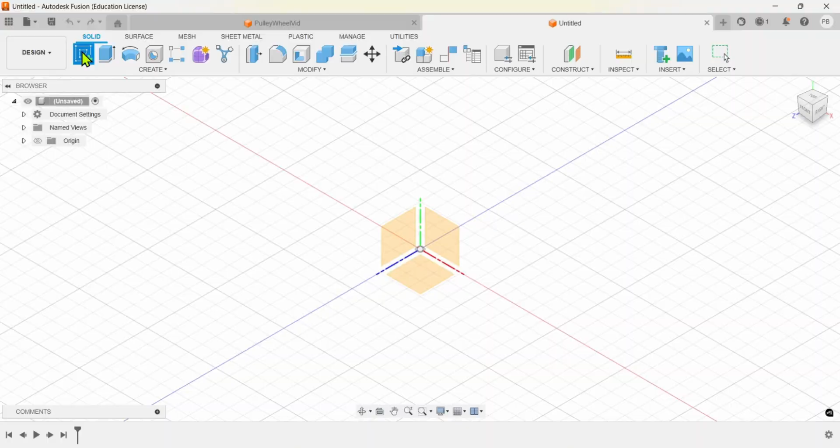In this video, I'm going to make a pulley wheel. I have an empty design right here. I'm going to come over to my create sketch. I'm going to click on it. And then I'm going to select a plane. I think I'm going to get this plane right here.

Click on that. Now I'm going to scroll in a little bit because it's going to be a small pulley wheel. That should work. I think I'm going to center this a little better though. So I'm going to hold my mouse wheel down and then just drag.

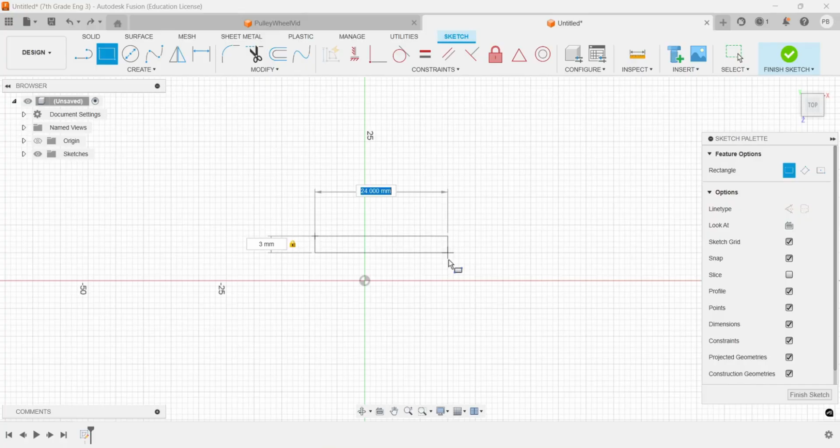Let's add a rectangle to our sketch. So I'm going to go to Create, Rectangle, 2-point rectangle. I'm going to click around here, drag this out a little bit, and then I'm going to type. Oh, it looks like it's got the height first. I'm going to do 3 millimeters for height, and then 30 millimeters for width. If you get the reverse order, just go ahead and put these values in.

Now you will notice if you click on this, you could move this around. It is not constrained. We should do that, right? So let's go to a constraint, and I'm going to go here. I'm going to look for the horizontal vertical constraint. Click on it. You can also see it up here.

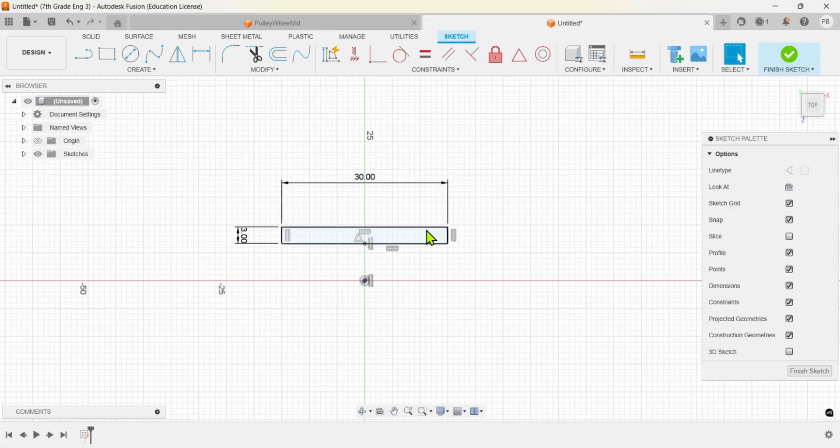I want to find the midpoint of this line, so I'm going to hold the shift button down. Oh, look at that. I see this little X with this little triangle there. That's the midpoint. Let's get it again. Click on that. I'm going to get the center point of my sketch. Click on that. Oh, now we got some constraints. And you'll notice that these lines turn black. But we can still move this rectangle up and down. Watch. Ooh, that's not quite there yet.

Let's go to Create. Let's go to Sketch Dimension. I'm going to grab this line right here. I'm going to grab the center of my sketch. I'm going to pull this out. I think I'm going to make this 4 millimeters. Now that is fully constrained.

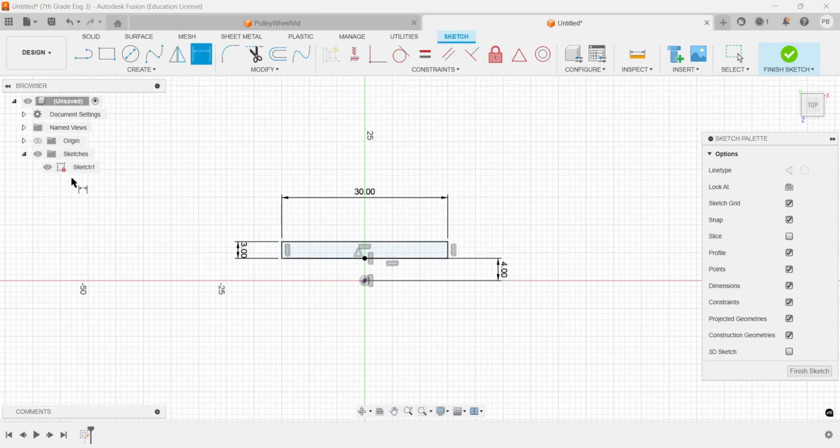How can I tell? If I come over to Sketches, open that up. Oh, look, I got a little red lock right here. That's good. That's what we're going to be shooting for. I think I'm going to move this dimension down a little bit so it's not really in my way. How about down below the drawing?

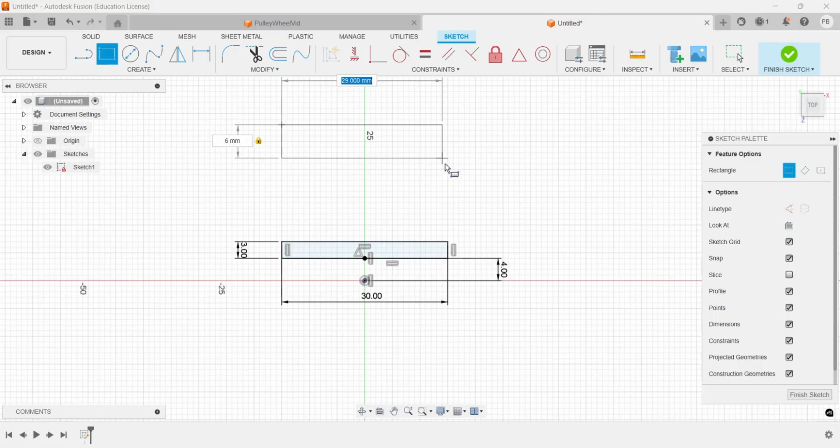I'm going to put another rectangle up here. Let's go ahead and hit Create Rectangle, 2-point rectangle, and then I'm going to try and line it up. I'm just going to eyeball it, then we're going to constrain it. So click, drag this out a bit. I'm going to make this 6 millimeters in height. I'm going to hit the tab, and I'm going to do 30 up here. All right, and this is a little high. I'm going to try and grab that, pull that down a little bit.

Now these lines are blue, and we lost our little red padlock. We could fix that pretty quickly though. Let's go to Constraints. Let's hit, what is it, horizontal, vertical. Click that. I'm going to hit this dot right here. I'm going to hit this dot right here. And we just constrained these rectangles to be vertical, right? The vertical lines along the y-axis.

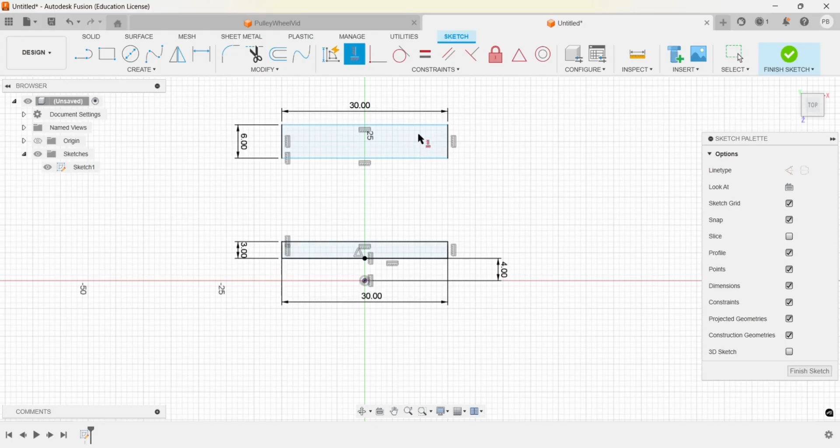Let's come over to this side. Oh, we notice these are blue. I think what I'll do is Create and then Sketch Dimension. How about click this dot right here, click that dot right there, and then let's make this 17 millimeters. All right, now check this out. All the lines are black, and we got our little red padlock back.

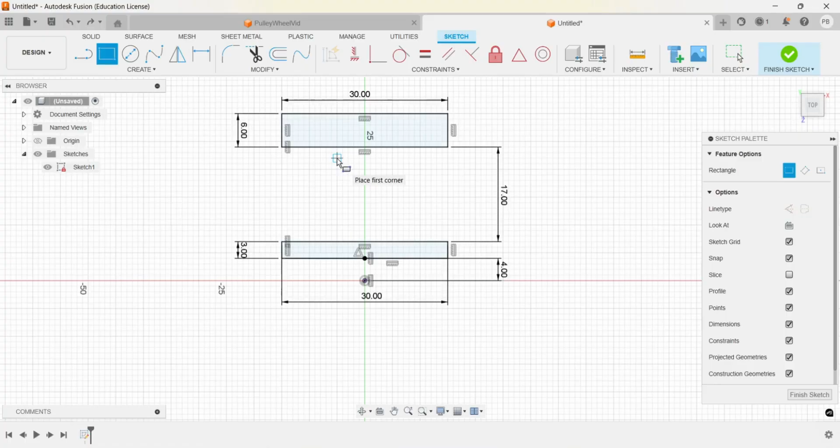Let's add a third rectangle. I'm going to come over to Create, Rectangle, 2-point rectangle. I'm going to intentionally put a gap here, and then I'm going to fix that gap. So I'm going to click. I'm going to drag this out a bit. I'm going to change the size. How about 12 millimeters on the height? Tab. 12 millimeters on the width. Tab. And oh, it's all blue and it's not touching.

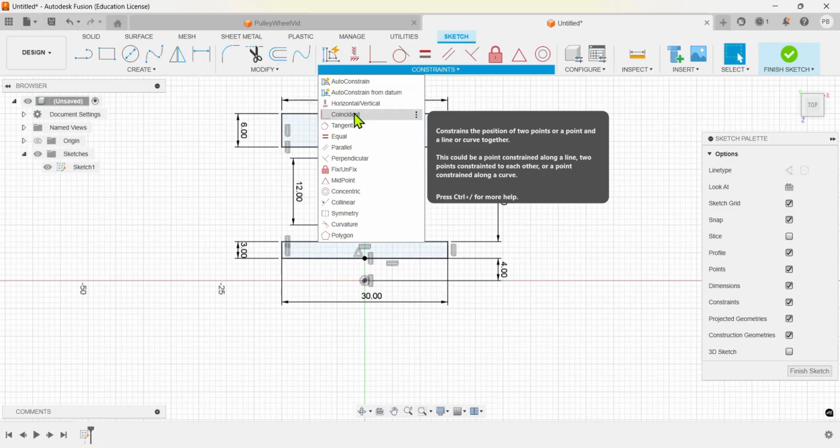Let's fix that. Let's go to the constraints here, and this coincident constraint is going to be good for making those two rectangles touch. Click that. Let's hit the shift. Let's look for a point here, right? I did a click, and then I'm going to come to this line, and I'm going to click. Oh, look at that. That's perfect. This little 12, I'm going to hit the escape button. I'm going to drag this 12 down just so that it's out of the way.

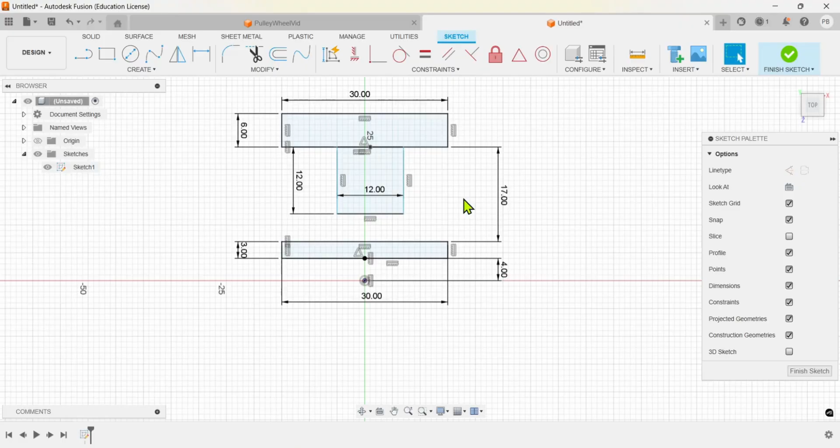And now this line is black and that line is black. They are constrained. But this one here and this one here is not. We can move it sideways, right? My mouse is a little flaky, but you can see that we can move it sideways. Let's do a Control Z, and I am going to come over to Constraints.

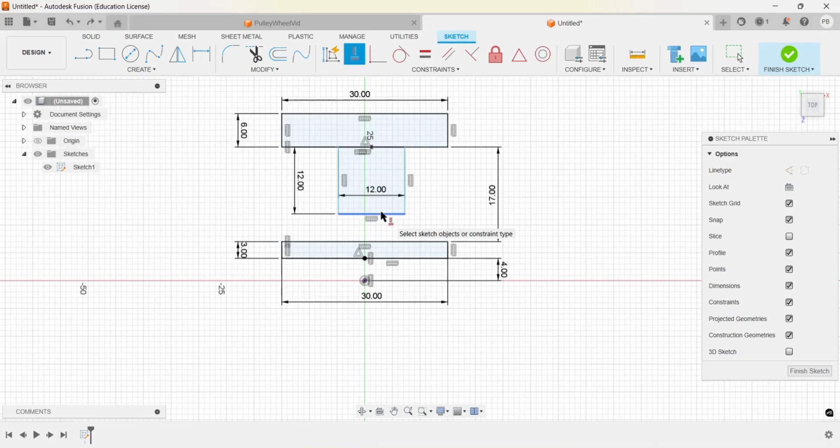I'm going to look for, what did I want? Horizontal, vertical. I'm going to find a midpoint of this bottom line. I'm holding the shift down. I'm going to click, and then I think I'll grab this point right here, which is constrained to our center point vertically. There we go. Now everything is fully constrained, and we got a red padlock back.

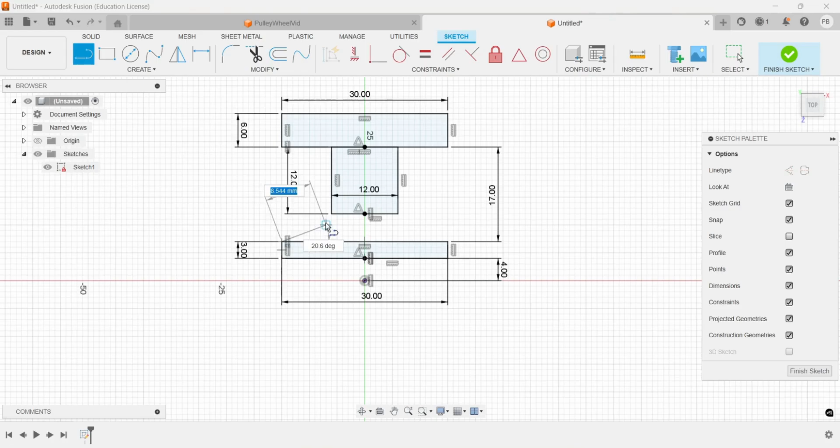I think I'm going to add 2 lines here for a base support structure. I'm going to go over to the line tool. Let's click on this corner right here. And let's come up. Boom. Oh, look at that. And it's black too. You don't even have to constrain it, right? Click that. Come up here. Click that.

And now you might be thinking, oh man, this is really hard to see what's going on. We can turn our dimensions off and our constraints off. It's just to see. You could turn them back on, right? They're not gone. But sometimes that's easier. Oh, but not this projected geometries. We're not using that, so I'm just going to recheck that. Just the dimensions and the constraints. Turn that on and off as you see fit.

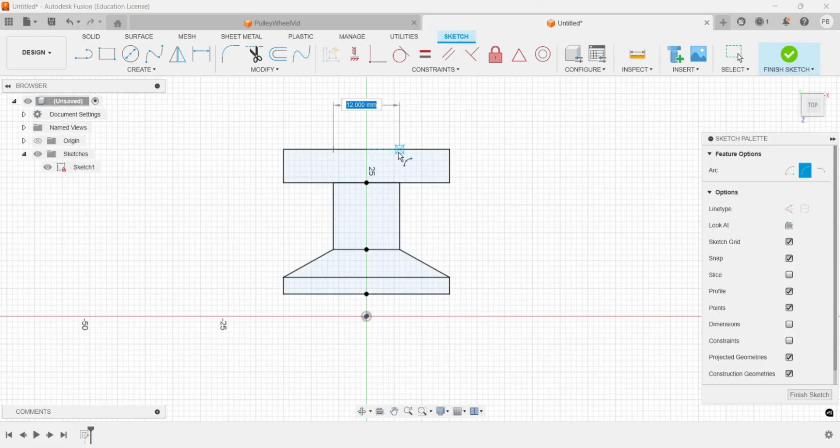Let's go ahead and make a little arc right here. That's going to be a cutout for our cable for when we make this a wheel. So I'm going to go over to create, arc, 3-point arc. I think I'm going to drag this down a little bit. So I'm going to hold my mouse wheel down and pull this down a bit. I'm going to click here, click here, and then I'm going to come down a little bit, click here. And it's blue again. Oh man, our little red padlock went away.

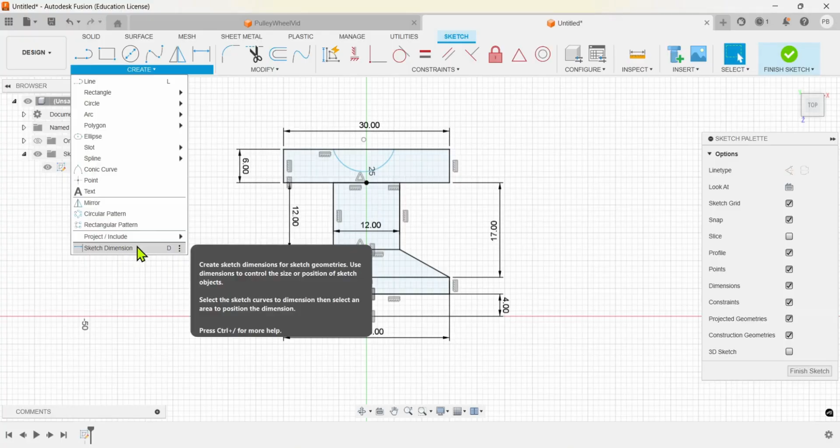I'm going to bring back the constraints and the dimensions just momentarily. I want to make this blue line turn black. So I'm going to go to create, and then let's go down to sketch dimension. Let's click on our curve, drag this out, click, hit a 6 for 6 millimeters, and then enter. Nice.

Let's line this up. So I'm going to go to our constraints, horizontal and vertical, right? I'm going to click the center point of our arc. There it is. I'm going to go down here, and I vertically constrained it, but it's still blue. It can still move up and down actually.

So create, sketch dimension. Let's get the center point of our arc and this line down here. And I think I'm going to make it 7 millimeters. There we go. And we can move this around. I'm going to hit escape to get rid of my dimension tool.

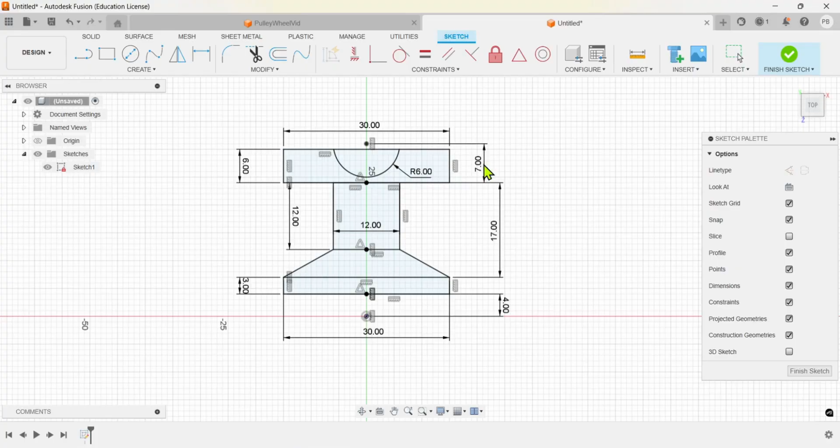There we go. And let's get rid of this line right here. We are going to lose a constraint, this Lego looking thing. It's because this line and this line are constrained to be equal because we made a rectangle. It's okay. We'll still keep our little padlock.

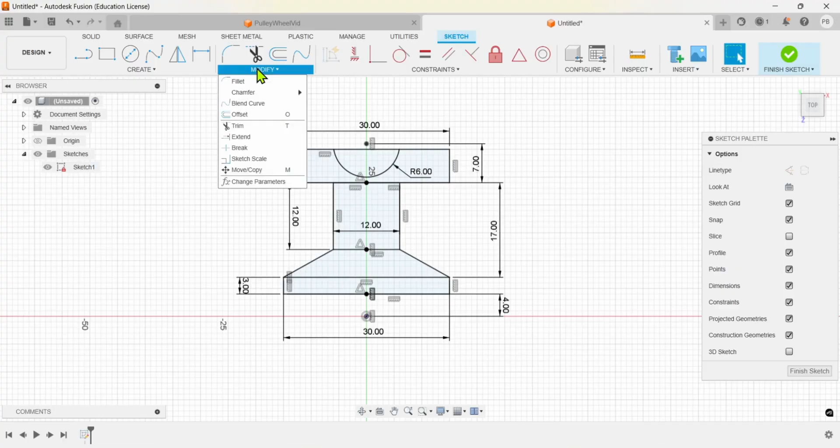Let's do that. We can hit the trim here, or you can do modify, trim, or you could hit T. Click that line. Boom, that's pretty good. And there, we had our warning down here saying, hey, we lost the constraint. But this is still red. That's perfect. Let's go ahead and finish our sketch.

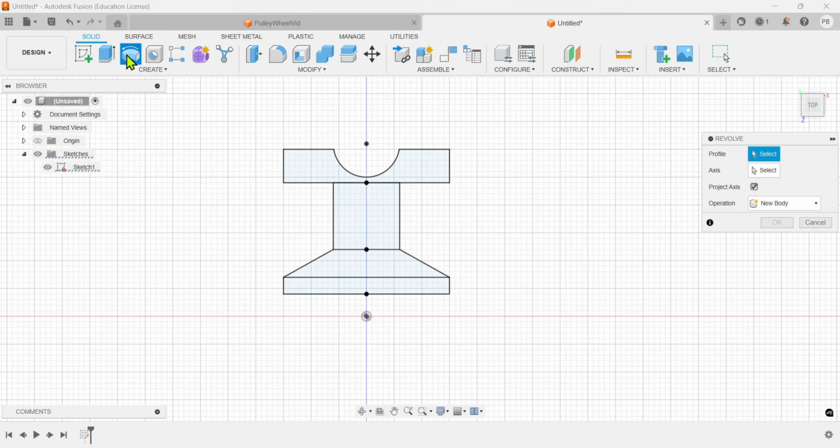And now I'm going to come over here to this Revolve tool. I'm going to click, and I'm going to select my profiles. 1, 2, 3, 4. I'm going to select the axis that I want to spin it around. Select, I'm going to hit this red. Boom, that's cool. And then I hit OK. Come up here, hit the little home button. Look at that, we have a pulley wheel.

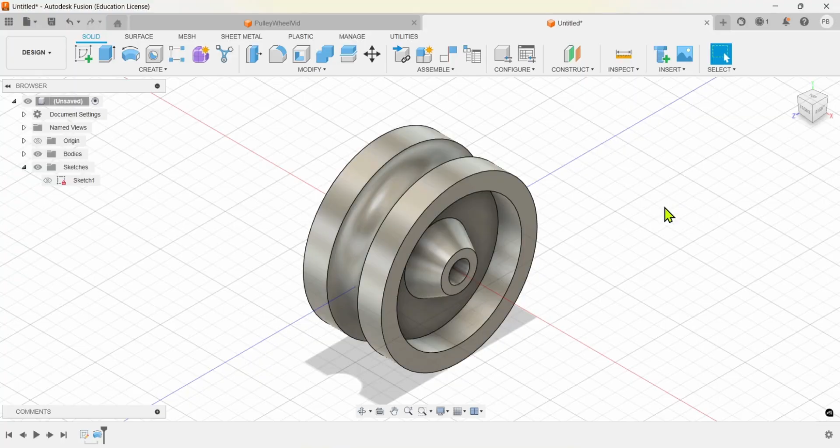And like always, don't forget to save your work. So I'm going to hit the save button. If you are in my middle school class, you could do something like your first name, because I'm going to search on it, and then last initial. And you can put a note like wheel or pulley wheel, whatever you want. This could be up or down. It doesn't matter where you save it if you're in my class because I'm going to search on your name. So go ahead and hit save.